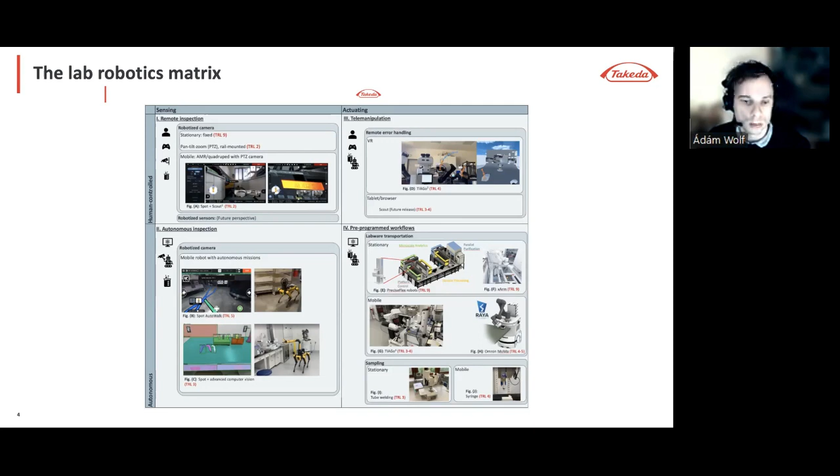So let me zoom in. It's quite a crowded figure. We will begin with actually the first segment.

That's the remote inspection. And what that means is the robot is equipped with a certain type of sensor. In most cases, it's an RGBD camera, at least that's what we were experimenting with the most. And the idea is to let a remote user, a standby worker or a lab expert from across the globe, from a different location, take a look at a specific laboratory unit operation. Maybe there was an error, there was an alarm triggered, and we want to know what happened. So one would log in to a web interface, drive the robot to the location where the error occurred, and use the camera or other type of sensor to acquire some data and information about what happened and whether an actual in-person deployment is needed to resolve the error.

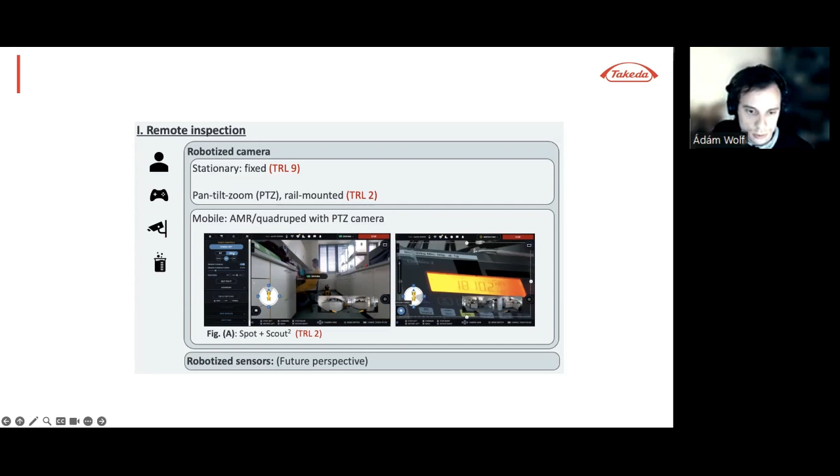The second segment is when we do it autonomously. So the robot does the same, acquires data, let's say visual data about a lab operation, but this time the path that it covers is pre-programmed. So you can have points of interest in the lab defined where the robot would take a picture and transmit that visual information to a computer vision algorithm to detect anomalies or actually just to track the status of the lab. There can be different use cases in this regard. This segmentation example on the bottom left you see is just one example where objects were detected and localized on the picture, and the semantic interpretation of the scene resulted in detecting anomalies in the workflow.

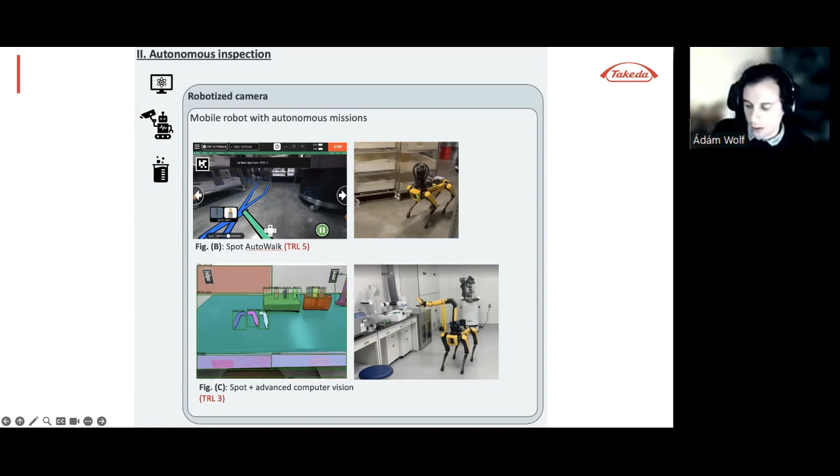The third segment is an interesting one. It's a combination of the remote inspection capability with actual manipulation capabilities in a human-controlled fashion. So that means that someone is controlling the robot, seeing the visual feedback from the robot, but is also capable of moving the arms of the robot to intervene in the lab process if needed. If there is an error, again the same use case, you would not just be able to assess what happened, but use the arms of the robot to actually resolve a physical error if it's possible.

So for that, a student project was focusing on creating a virtual reality-based cockpit, a virtual cockpit, where the user saw a three-dimensional stereoscopic image in the middle coming from the stereo cameras of the head of the robot, and also the wrist cameras for fine manipulation tasks. And with the virtual reality controllers, the user was able to relatively move the robot's arm in fine precision and manipulate objects. So there was a series of tests conducted to assess the usability, and lab users were capable of driving the robot and performing this basic manipulation tasks.

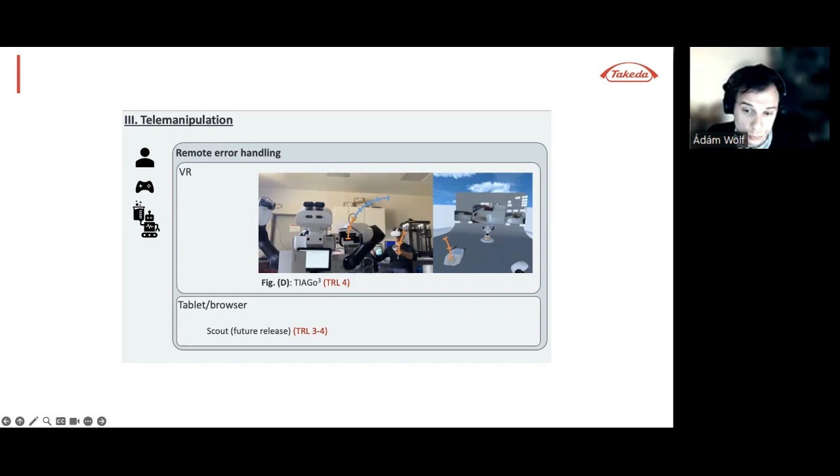And now the final fourth category, and the biggest one, the most important one, and also the most mature one, is pre-programmed workflows. This means that the robot does something in the lab actively, performing manipulation, and does so in a pre-programmed sequential fashion. So this is how most robots actually operate. Also in other domains, they have a program, a motion sequence that they perform, and that does something in, let's say, the manufacturing process. But here in our case, of course, it's nothing like that.

It's more the laboratory tasks, such as labware transportation. That's one of the biggest use cases. Robots do that both in a stationary benchtop setting and in a mobile setting. So the latter is a relatively new field, gaining coverage in the laboratory setting, but also introducing a lot of complexity. And to that, I will talk in more detail later.

But here I also want to mention another use case, which is sampling with the robot. So basically, in a laboratory, let's say biologics process development laboratory, a common use case is having to take samples from different unit operations, let's say a bioreactor or any other instrument. And for that, normally a human would need to go attach the sampling syringe or any other container, pull the sample, seal the line, take the sample to analytics. Now, what we looked at, and here also you see relatively low technology readiness levels, meaning that this was a proof of concept study, we looked at tube welding and how we can robotize it.

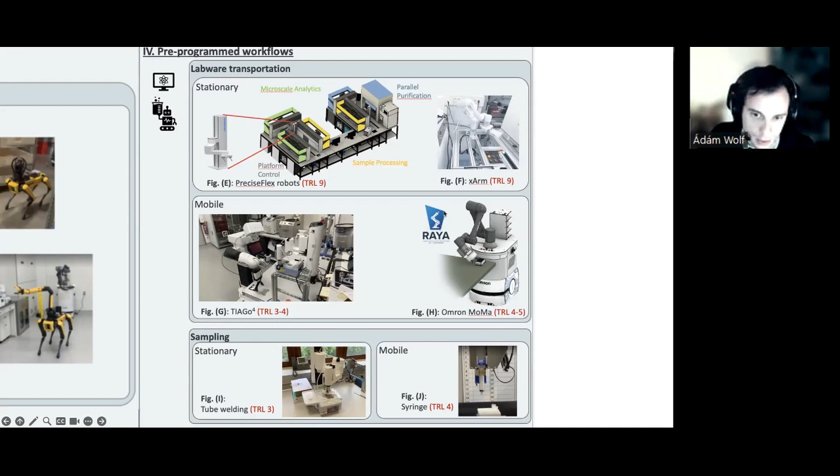So this much about the general landscape of supportive lab robotics. And as I said, I want to turn more attention to a specific segment of that, which is mobile manipulation in the lab. So when we speak about mobile manipulation, it's important to distinguish between two different sets of lab operations. One is high throughput use cases where there are routine tests and repetitive workflows. And usually these are robotized with highly customized, purpose-made robotic cells, which can operate in setup and leave or even lights out fashion.

And contrary to that, in R&D laboratories and process development laboratories, more flexibility is required. There are dynamic workflows, standalone equipment that's often not robot friendly, but designed for human operation, which means that still there is a lot of manual work included with these processes. To bridge the gap, collaborative and mobile robotics are emerging, also in other segments, but starting to gain coverage in the lab scene because they can operate in human designed environments. And that means less structured environments.

So the location of the units change. They have to interface with an array of different variety of equipments and do that together with humans in cooperative or collaborative operation. So when we put a traditional stationary robot, like you would imagine an industrial robot, next to a mobile manipulator and compare them to humans, we see that mobile manipulators are sort of in the middle ground in terms of availability.

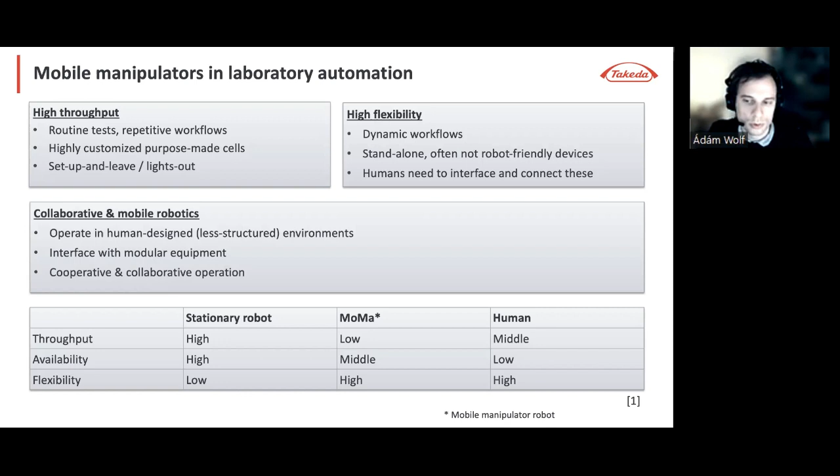So with this in mind, we had a specific use case in the lab. Here it's detailed. We had an object of interest that we wanted to transfer between different devices in the lab. And this was a standardized container, an ANSI SLAS conform, also known as SBS microplate, that is usually fed into lab devices, liquid handlers, analytical devices, storage devices at fixed handover positions, also known as sites. And there are fixtures to hold the piece of labware, the microplate, that allow a tolerance for the robot to insert it with still relatively high accuracy needed.

So that's why these applications need optical markers, so-called landmarks or fiducial markers, to aid the robot with detecting this handover position, especially for mobile manipulators. In our case, the pickup and drop-off locations need to be defined by means of a parameter in the command, because our workflows are dynamic, as I was referring to, how it is usually in R&D, and we need to reconfigure depending on requirements. The robot will also need to navigate between not only different stations, but different laboratories and even different floors, so there is a lot of complexity that goes into it, and I will go into those topics in more detail.

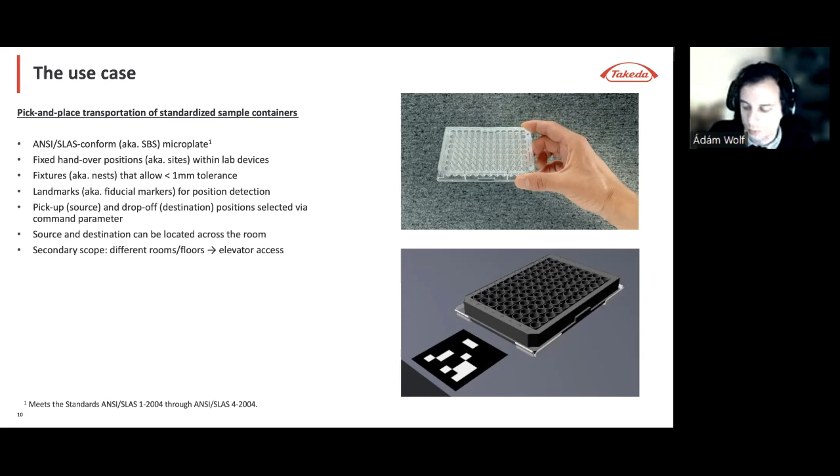When we started looking into this use case, we assessed what's out there on the market in terms of mobile manipulation for lab automation purposes, and it appears that there is already quite a landscape of solution providers with different platforms.

These have a lot in common. All of them feature an autonomous mobile robot, an AMR base, capable of autonomous navigation, localization, and mapping. On top of that, the integrators mounted different types of robot arms, either 4 degrees of freedom SCARA robots or 6 to 7 degrees of freedom articulated robot arms.

What's also common is that they all need an additional perception system to detect the fine positioning of the handover site. The reason behind that is the mobile base itself has an accuracy maybe in the centimeter order of magnitude, but the accuracy needed for inserting the plate in the fixture is in the millimeter order of magnitude. So to bridge that gap, you need to localize the position.

Most of these solutions do that by vision using fiducial markers, but there are also examples with tactile probes and tactile sensing. These robots all feature custom end effectors suitable for the manipulation of microplates, and that is pretty much a standard anatomy that they share.

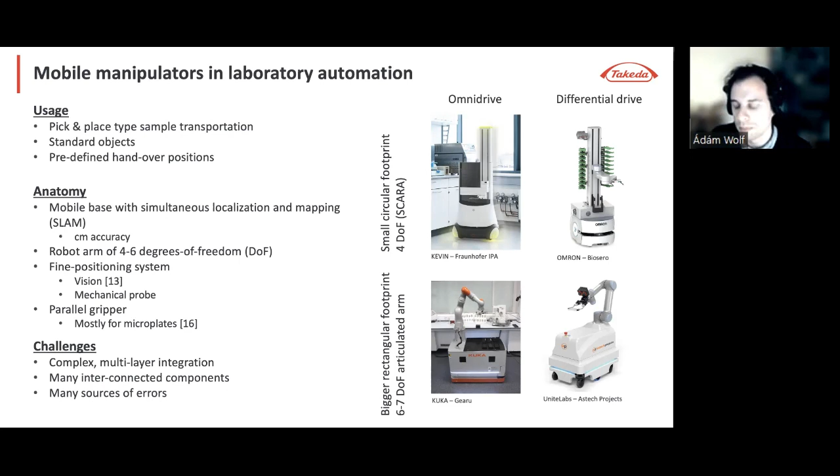So to answer the challenge, we started working on a proposal that I want to introduce today: this is the laboratory automation plug and play framework, which is intended to serve as a reference architecture model.

The motivation behind it really starts with what we want to standardize in the lab, and that itself starts at the bottom, with the physical layer, the process layer itself, where the containers and the physical aspects of the process are partly already standardized. I was referring to the SBS microplate as an example, and that already makes it simpler for the instrumentation layer to interface with the physical objects.

By the instrumentation layer, I mean the lab devices - the analytical devices, the pipetting robots, but also the supportive lab robots that connect these units with each other. Through physical interfaces like the standardized gripper, these two layers can interact physically.

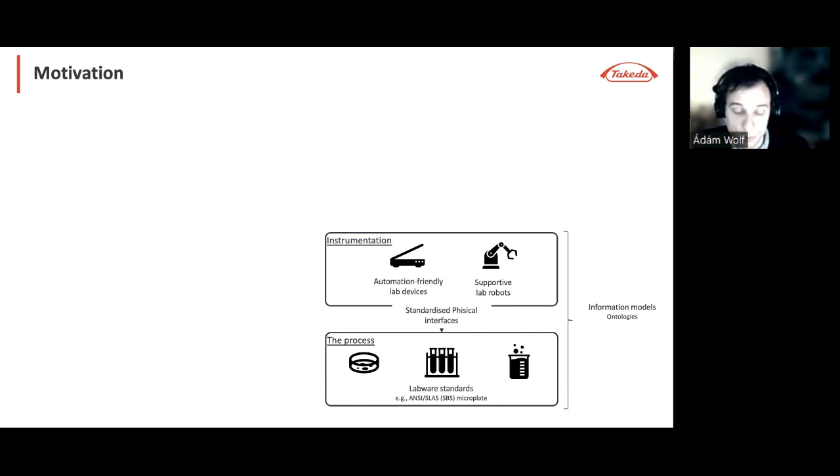Now, talking about the assets in the labware and the instrumentation, it's important to mention that to maximize the ease of integration and aim for plug and play integration, we need to represent the relevant pieces of information about each asset in a standardized and compatible data structure, or so-called ontology, to enable a master control layer, an orchestration layer, or scheduler layer to actually control the process.

The instrumentation layer is the one that the orchestration interfaces with, in the best case scenario, via a standardized communication protocol - and by standardized I mean an open protocol that is not proprietary, documented, and free to use. Of course there are proprietary protocols, but that's exactly where we want to get away from and strive for standardization in all of the aspects I am presenting right now, including the process programming aspect, to represent the workflows in a standardized fashion that's transferable between different laboratories and has a suitable level of abstraction.

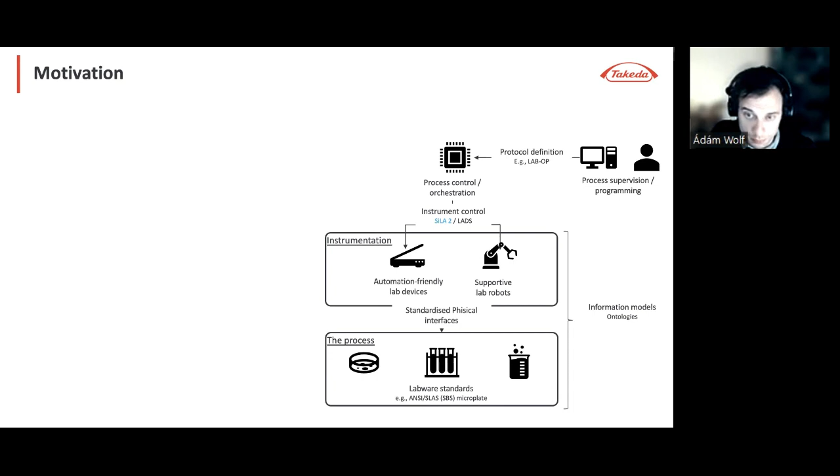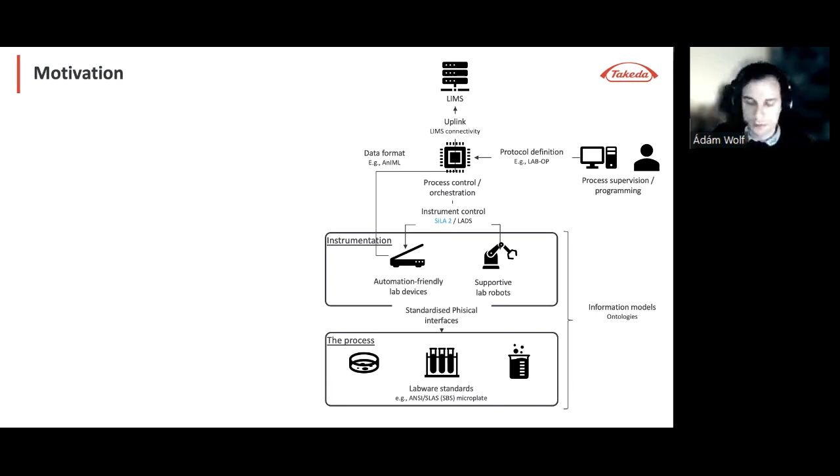Ultimately, we want to have an uplink towards a laboratory information management system, because we want to get the data out of the instruments, and the data format itself is certainly something we need to standardize. There are already initiatives to do that. The problem with the present state is that these systems are becoming increasingly complex.

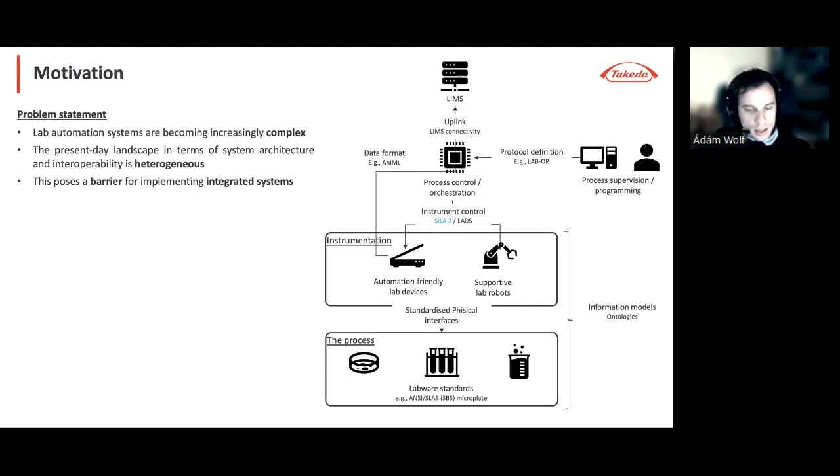And it's a fairly heterogeneous system architecture that we are dealing with. And of course, this poses a barrier for implementing these systems. So what we propose is, with the laboratory automation plug and play concept, to create a holistic and agnostic reference architecture model for covering the whole vertical of the laboratory automation ecosystem by outlining the canonical layers and components in

the integrated system and the control architecture, and also allocating existing building blocks for different aspects and creating an overarching blueprint how to combine them or how to extend them with additional components to achieve a standardized communication between the components and also create the standardized information representation aspects that I was referring to.

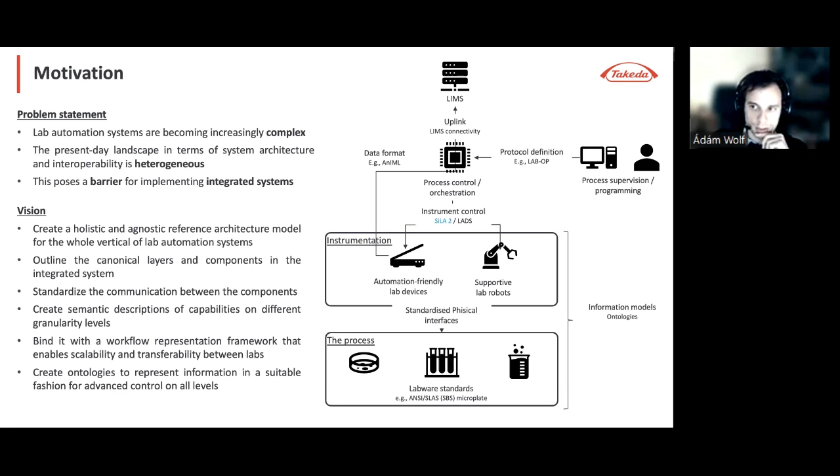So this is exactly what the LAPP concept itself, and this is something that we published in scientific papers, outlines. We have a hierarchical decomposition of the robotized lab workflows, a multi-layer control architecture, and these two are mapped against each other. And also the information model in the form of a digital twin, a device-centric information representation to achieve ultimately, in the case of supportive lab robots, a teaching-free plug-and-play integration of the lab devices. And then, of course, communication protocols that I was already referring to.

And on the bottom, you see how this endeavor was addressed by the means of a series of projects, first starting with the early technological readiness level in the form of the concept proposal, and then creating academic proof of concept studies, and then working towards the industrial implementations that I will present in the second part of the presentation.

But first, let me draw your attention more to the concept itself and start with the hierarchical decomposition of the lab workflows. And that really starts with looking at what a specific lab provides as a service, a set of services. So be it like high throughput screening or microscale process development services. This is a bunch of experiments that the specific lab setup can run, conduct, or execute. Experiments, you could call them assays or procedures, like chromatography, parameter optimization run.

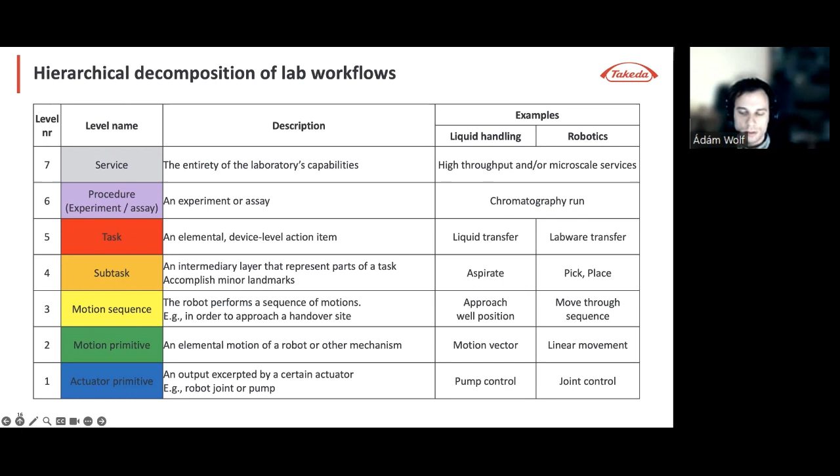And then come the low-level parts that are, in most cases, masked away from the lab orchestration layer and dealt with by the low-level robot controller, middleware, or even the embedded controller that I will present in the next slide. So these are the motion sequences and motion primitives, and ultimately the joint level actuator primitives.

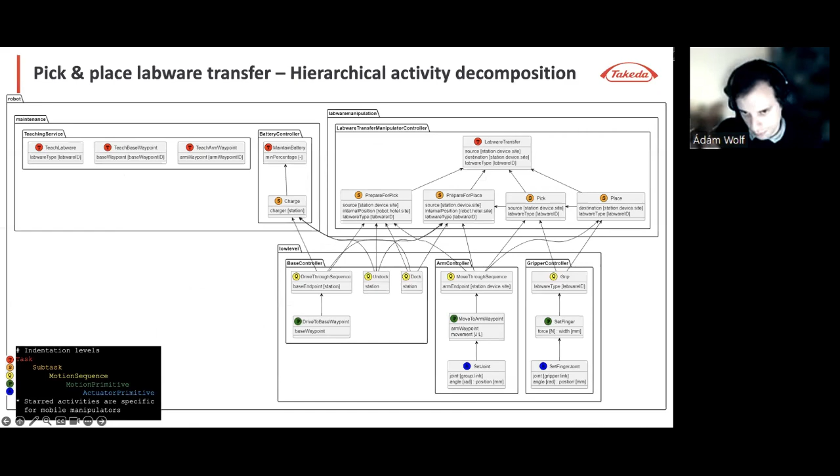But the most important one, and that's the one that's usually exposed, let's say via SiLA interface, standardized laboratory automation communication protocol, is the task and subtask level activities for the outcome-oriented task. So that means the labware transfer itself is parameterized by really just the source and the destination location, and maybe a labware type or labware ID. And it's broken down into picking and placing, and also letting the source and destination device know when to prepare for input or output.

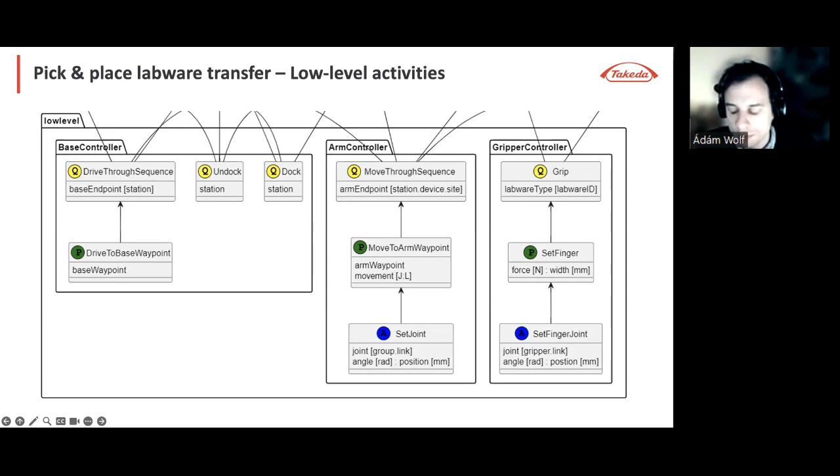What's below that, and this was also visualized on the previous tables, the low-level part, as I said, is masked away from the high-level controller, from the scheduler. So this is already from the robot's perspective, from the perspective of the components of the robot: the arm, the base, and the gripper. And it's the robotic middleware that controls the motion sequences.

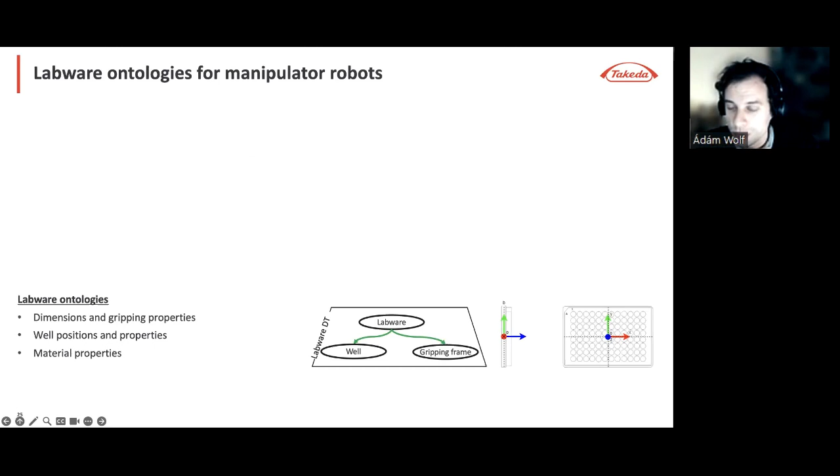Now, arriving to the second aspect, the ontologies, I want to introduce what we consider the most important piece of information for supportive lab robots, the relative hierarchic representation of frames of references. So basically, positions within the context of the asset. And this asset can be a piece of labware or a piece of lab equipment.

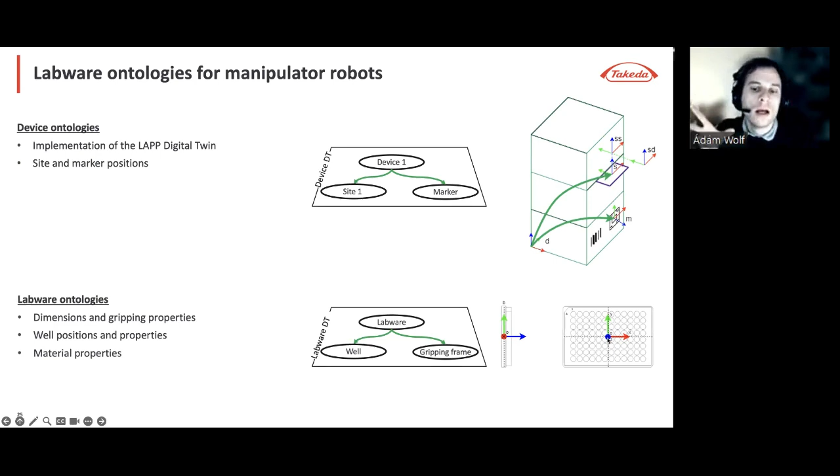In each case, we need to represent the position of the previously mentioned optical marker that the robot can detect and bind to its own coordinate system, and the frame of reference for the handover site, where finally the robot needs to place the labware and ultimately align the frame of reference of the labware with the frame of reference of the handover site. So how it looks in more detail and more visual representation, how it's connected.

Here you see with green represented what we call the digital twin instance of the device. So in this representation, you see the relative positions in the context of the device between a device coordinate system, the marker, and the handover site. So the robot tracks its own configuration with kinematics and motion control, and also navigation.

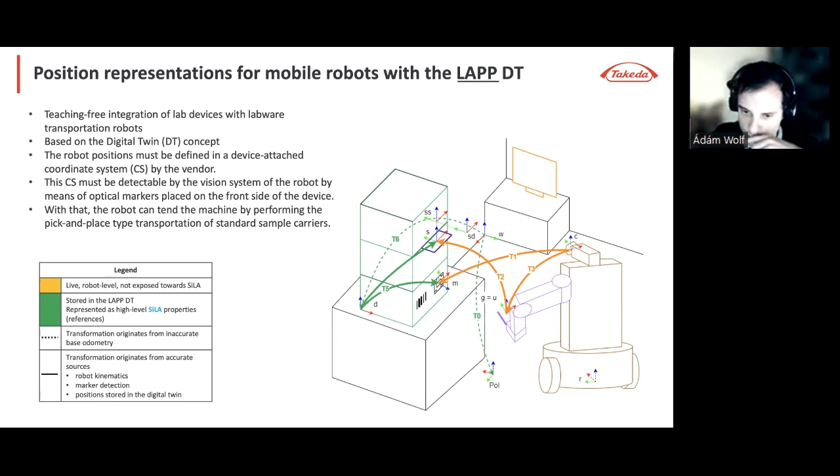And when the computer vision functionality kicks in, that's when the robot can bind the reference of the device with its own coordinate systems. But let me switch to the next slide where this hierarchical representation is visualized from a different perspective. So here you see how the coordinate transformations are connected.

So basically, in each case, the robot localizes itself with relation to a map of a room, and there are different stations located on this map. And at each station, there might be an array of devices, each device having its own array of sites where the labware can be located.

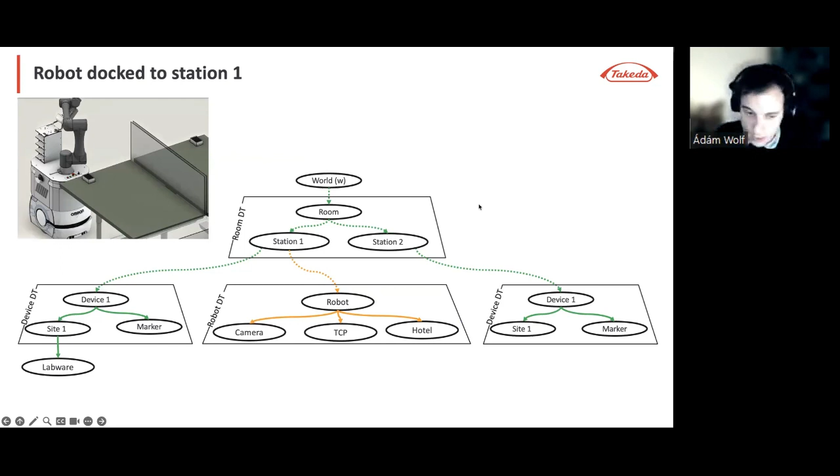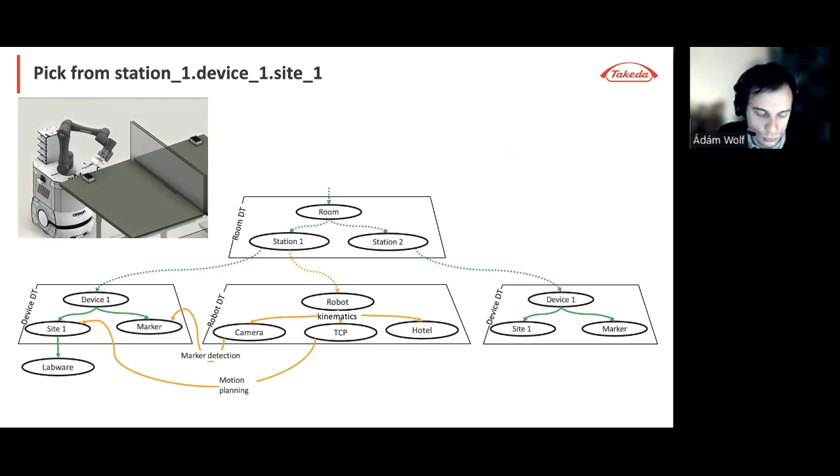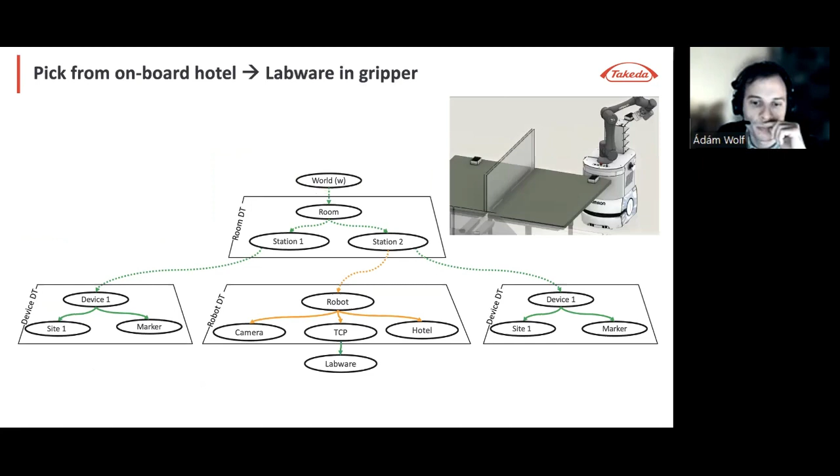And the robot needs to drive to the first station, localize itself inaccurately with relation to the map, but then accurately detect the marker position with computer vision, plan the motion from the tool center point of the end effector to the pickup site, get the labware to the tool center point, position it on the onboard storage or hotel, then navigate to the next station with simultaneous localization and mapping in the centimeter accuracy, pick the plate from the hotel,

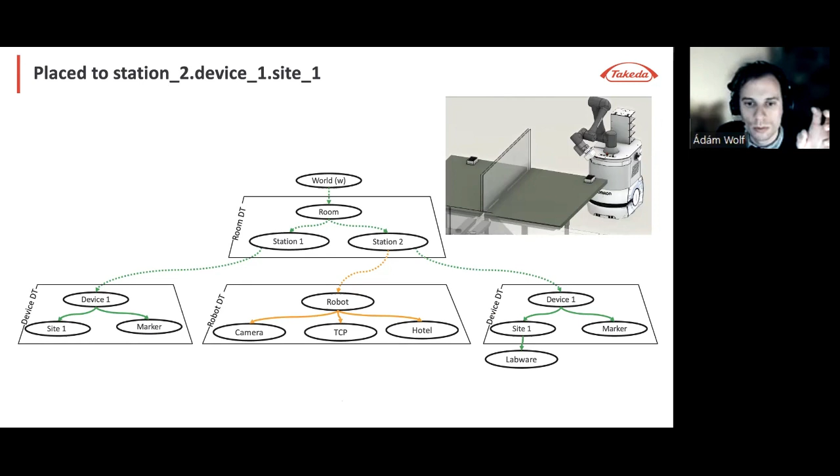detect the marker of the second station, do the motion planning again, and finally place the plate there. So this is in sequence how the digital twin concept comes together, how the hierarchical representation of the positions is implemented.

So to create proof of concept studies, we took existing building blocks for specific aspects of the ecosystem. And as such, I already mentioned standardization in laboratory automation, or SiLA in short. I'm wearing my second hat besides Takeda with the SiLA Consortium as the lead of the Robotics Working Group. And as such, I wanted to also talk to this topic.

SiLA as a consortium is a not-for-profit membership organization. It provides a platform for exchanging and collaborating on the development of the standard itself, and that's the core working group, and on the development of domain-specific guidelines and feature definitions. That's what we do at the Robotics Working Group. The standard itself has 3 layers: the specification, a conceptual one, a technical one, and then a domain-specific collection of features.

From the technological perspective, it's a service-oriented interoperability protocol where a lab device, or as a matter of fact, also a lab robot, is considered as a service provider that implements a set of features. And the service consumer is considered as a client that triggers specific commands as part of these feature definitions.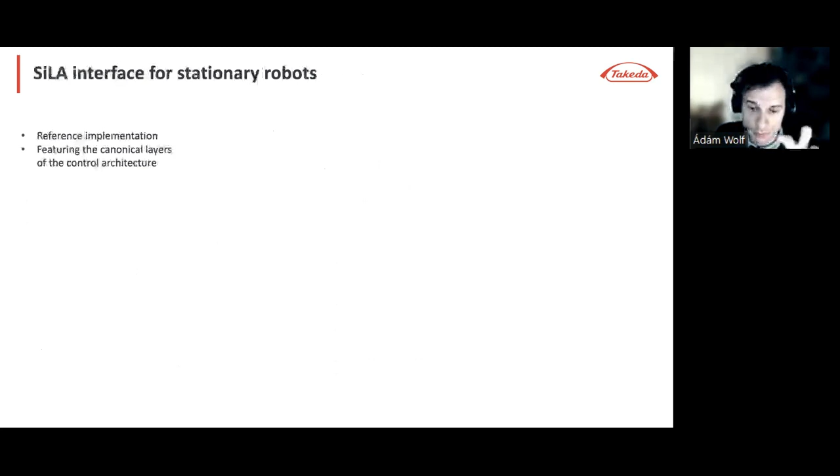Now, speaking specifically to the reference implementation for standardized stationary labware transfer, I want to introduce a setup that we created in the course of one of these hackathons. Two types of robots, both stationary benchtop robots, connecting to storage units and a plate reader as an exemplary workflow, a set of sensors and actuators, an embedded controller for each robot, and also for the plate reader, a device level controller, and on top, a scheduler. So here you see the same canonical layers that I presented earlier towards the beginning of my presentation.

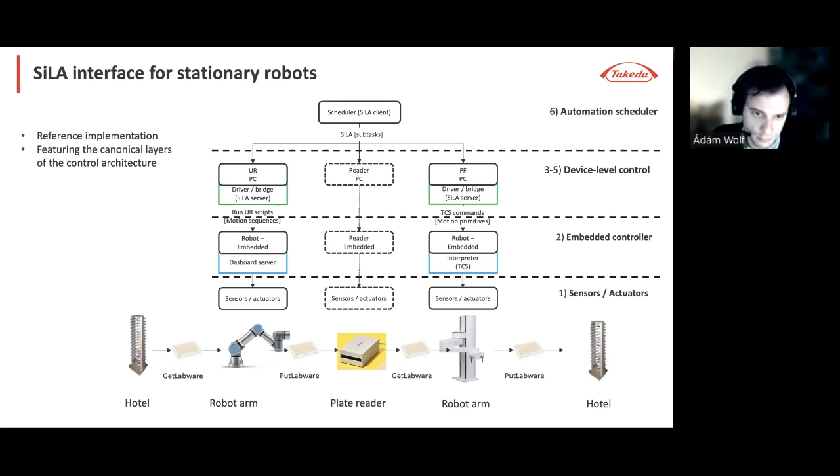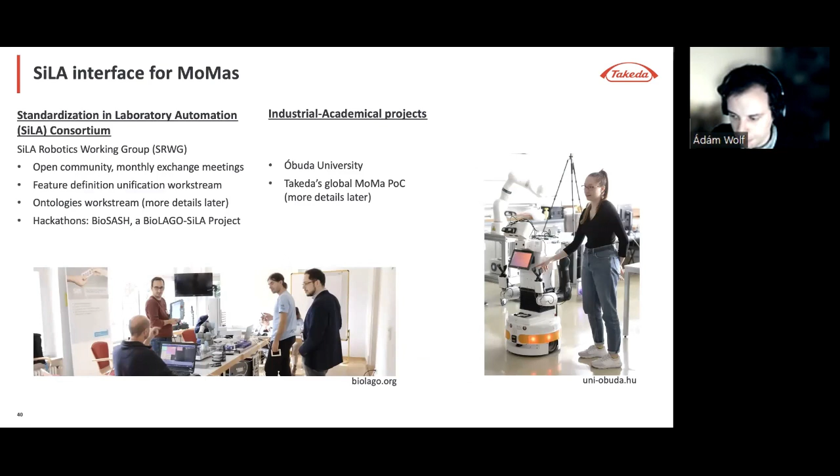And this was taken then a step further by an academic partner of ours, the Óbuda University, where a ROS-based mobile manipulator was used. And basically, the building blocks that I presented earlier were put together. The building block of the SiLA ROS bridge, which was also subject of a previous hackathon. And here you see a technical outline of this bridge.

This means that SiLA is responsible for the high-level scheduler side of communication, while ROS is responsible for the low-level, the robot-specific communication. And the bridge implements both a SiLA server and a ROS action client, service client, or topic interface, depending on what low-level robot interface is available.

It's important that throughout this exercise, we created a table where we mapped the concepts of the SiLA ecosystem against the concepts of the ROS ecosystem. I won't go into more detail on that for the sake of time, but just for example, an observable command on the SiLA side is implemented in most cases as an action on the ROS side, because this is an activity that typically takes a bit longer and you want to get continuous feedback from the scheduler's perspective also.

So the reference implementation at the Óbuda University also addressed a similar workflow as we did with the stationary robots, and utilized again the canonical layers of the system architecture. The device level control layer was the most interesting one. There we implemented the SiLA ROS bridge and also an interface to the digital twin of the devices to get the positions that I presented earlier.

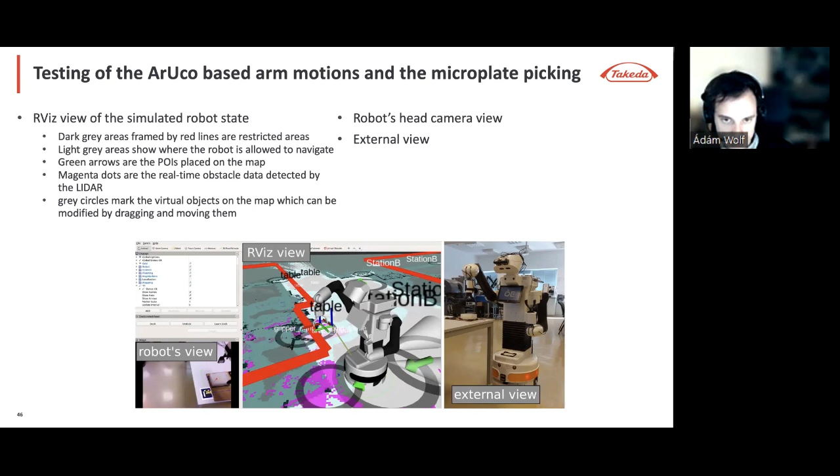And now let me proceed to the more mature reference implementations, or I would say the pilot projects that utilize the same concepts, but now in an industrial setting. So at Takeda, we have use cases in the lab with a set of lab devices that we wanted to automate and integrate with each other to have an end-to-end workflow. And to do that, for the sake of flexibility, we decided to use not stationary but mobile manipulators. First, only one of them, but then potentially combining multiple different ones in one system.

So here again, you see the layers of the system architecture with the scheduler on top, the device level controller, and then the low level hardware side control. And in the case of the MoMa, you see what I meant at the beginning when I said these are complex systems in themselves. The MoMa has a built-in controller, the interfaces, the vision system, the arm, and the base.

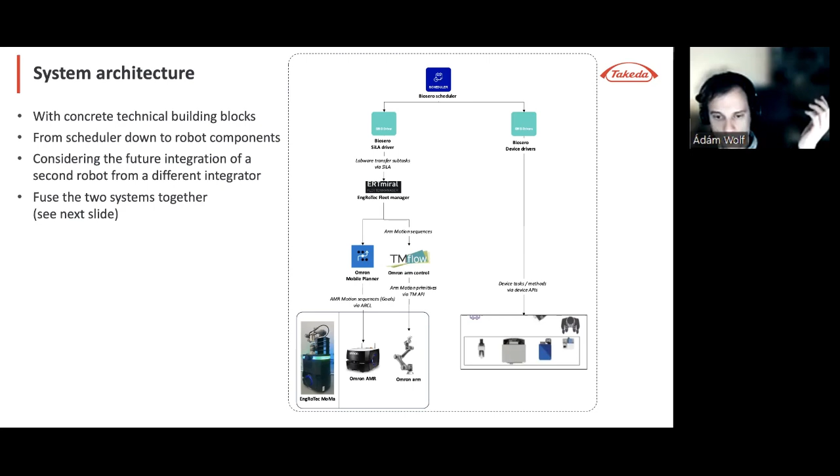So in our case, there was a selection of specific devices and interfaces and robots, and also middleware for the robots. It was based on Omron components, an autonomous mobile robot and the collaborative robot arm integrated by EngRoTec and controlled via SiLA by Green Button Go scheduler from Biosero. So this is an ongoing project. We are still working on figuring out the actual system architecture to cover all of the complexities of the landscape, and also considering scalability and future extensions. And there we arrive to the future state where we will have multiple robots from different vendors.

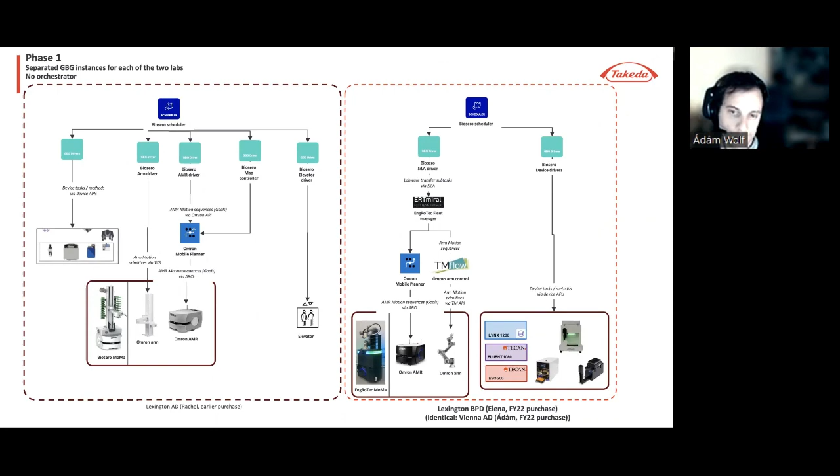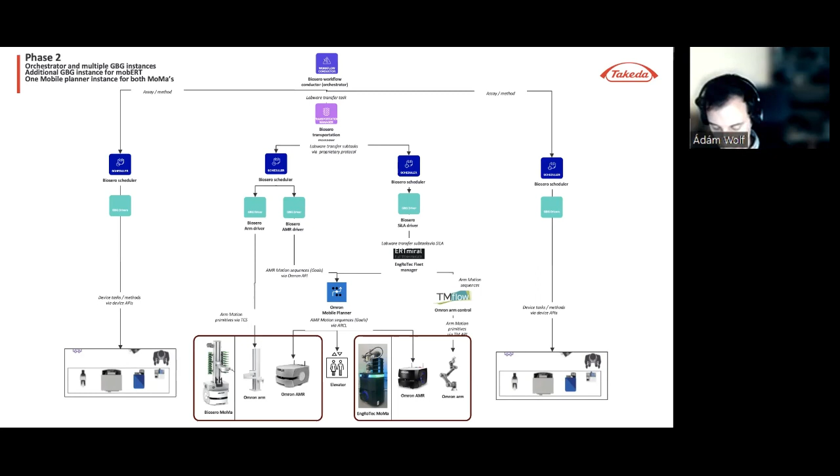And we want to initially set up separate systems, separate scheduler instances, but eventually combine them into a fused overall integration platform with the help of an overarching orchestrator and transportation layer. So there are really some intricacies to that, figuring out which component is responsible for controlling the elevator. Is it the fleet manager? Is it the middleware? How we can bring together the two ecosystems to finally form one functioning, and optimally functioning, system.

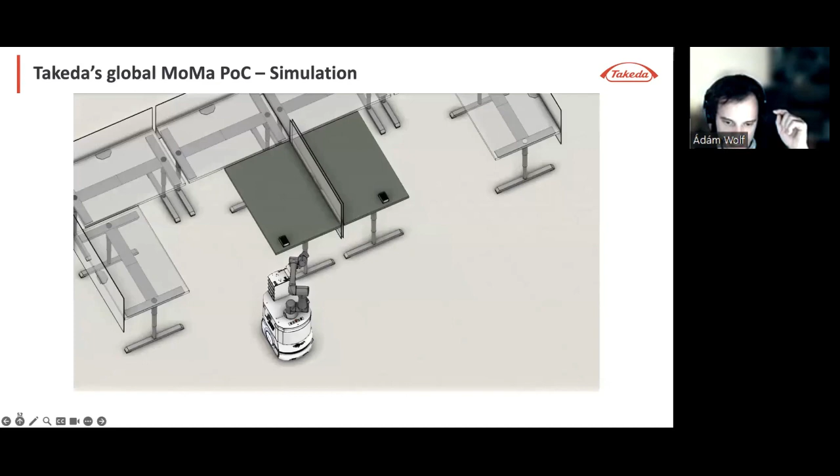Finally, to close my presentation, I want to present a few videos, starting with how we started during the planning with computer-aided design-based simulation from Agrotech. And this was used also for the sequence that I presented for the hierarchical position representations. So here you really see just a bench-to-bench transportation. But the next one is a more, I would say, fancy one.

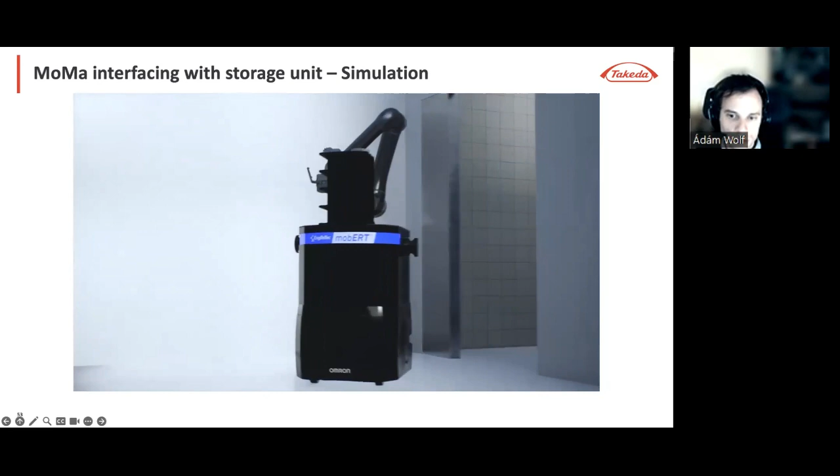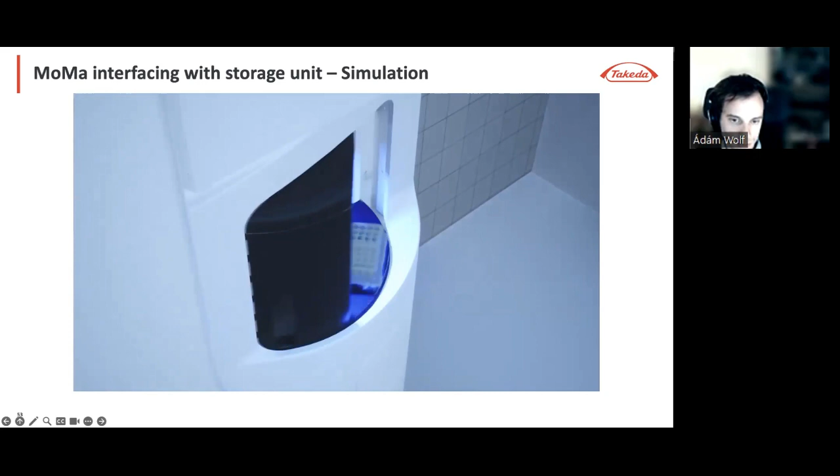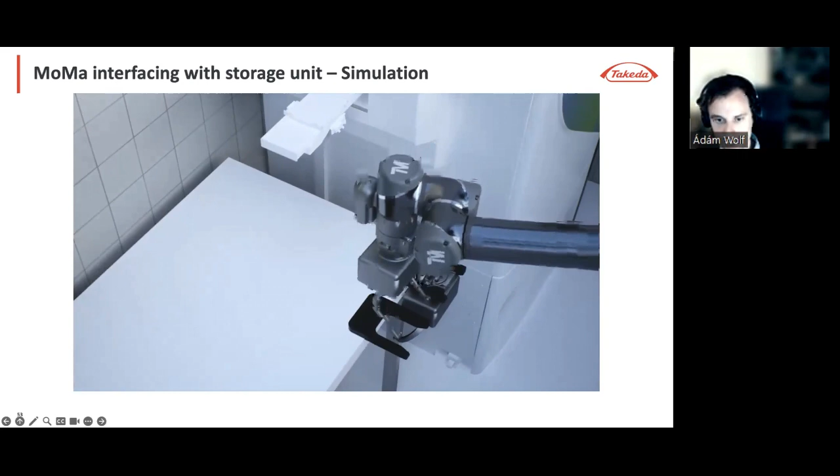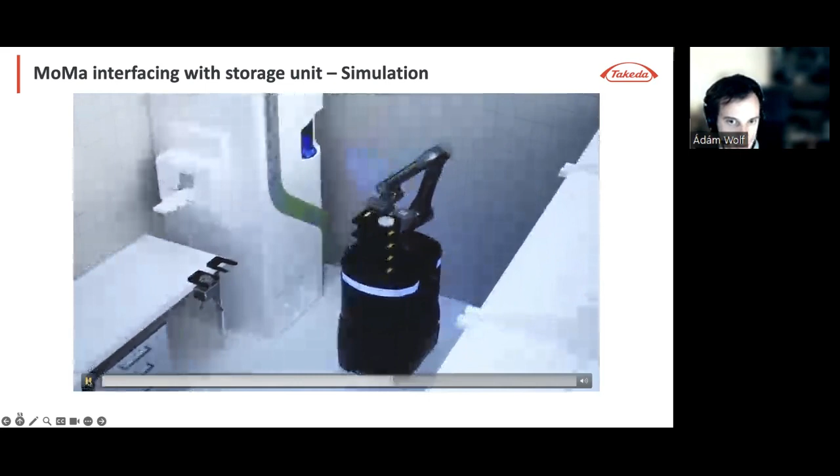Here you see the robot actually interface with an automated door and then arrive at an automated storage unit, again using the computer vision system to detect the handover site, load the microplate, and then arrive at the next interesting feature, the tool changer, where you can swap the end effector for a different one. And instead of microplates, this time be able to manipulate Petri dishes. So here I will stop when it picks it up, but I think you get the benefit that this tool changer provides in terms of flexibility.

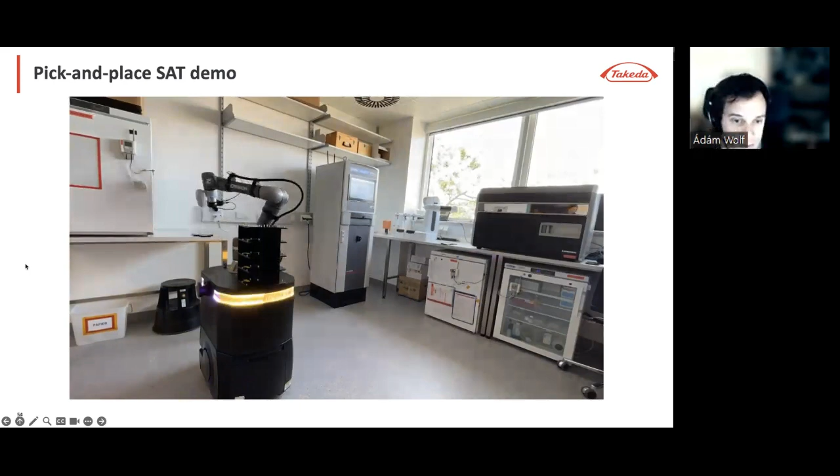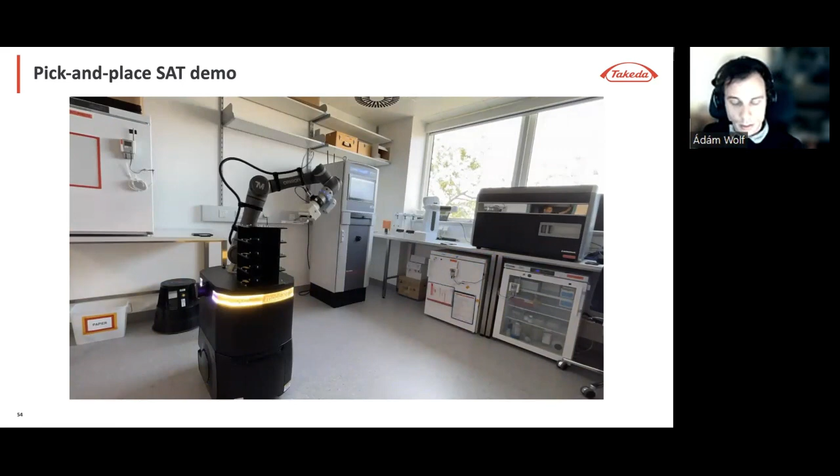So finally, the actual site acceptance test looked like this. The robots performed in the lab, same sequence from one bench to the next bench, and successfully did so also in a looped fashion for stress testing. And this is where we are right now. We are taking a step-by-step approach towards achieving the overall integration architecture that I presented as a concept. We do that from bottom up. So on top of the robot middleware, we will implement the standardized SiLA interface and connect it to the scheduler and then to the orchestrator.